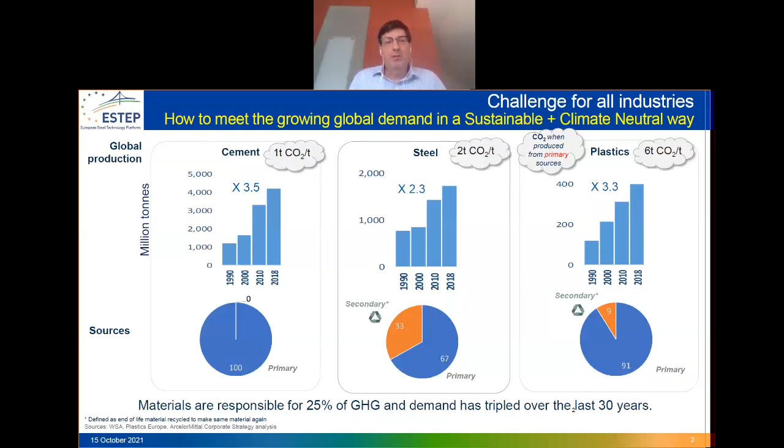We are convinced that the technologies fulfilling this objective are finally the winning ones, meeting the criteria of scalability, affordability, and contributing to a high level of circularity.

For steel, this means we have 2 basic approaches: starting with iron ore, the so-called primary steelmaking, and the second steelmaking route starting with scrap. Both will play a major role in finding solutions, and both are still challenged to significantly improve.

If you look at the real figures on the right side, the left one is primary production, starting with BF-BOF, blast furnace, basic oxygen furnace. Typically today it's around 1,800 kilograms of CO2 emissions per ton of crude steel. Following the Green Deal objective Andrea pointed out, we have to go down by 55%, meaning 810 kilograms emissions. Climate neutrality means going down 85–95%, and 85% means 270 kilograms of CO2 emissions. So these are really huge challenges lying ahead of us.

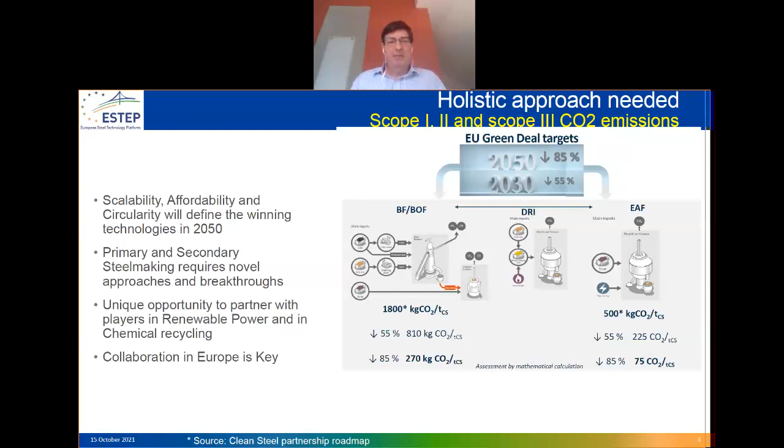The leading instrument for collaboration is the Clean Steel Partnership, aiming at accelerating the ongoing and planned work of producers towards climate neutral steelmaking. The two next speakers will give impressive examples of company approaches to really make it happen that CO2 emissions are reduced, because the partnership, as Andrea already pointed out, brings together the public and private side.

From the private side, it's ESTEP, the European Steel Technology Platform, importantly supported by Eurofer. So Eurofer, the steel producers and associations, broadened by ESTEP to include plant builders, research organizations, academia, and other stakeholders along the steel value chain.

I cannot dig into all the details of the partnership, but let me emphasize that it is all about having impactful projects, so large demonstrators, at least 4, reducing CO2 emissions by 50% or even 80%. That's the objective of the partnership, to deliver such demonstrators.

It also brings a unique element in blending financial public means. One is 350 million euro from Horizon Europe, and the other financial pillar comes from the European Community for Steel and Coal, so to speak, the grandfathers of the European Union as such. This last bullet point indicates a very important contribution, but it's not the full financing of the need for research and innovation.

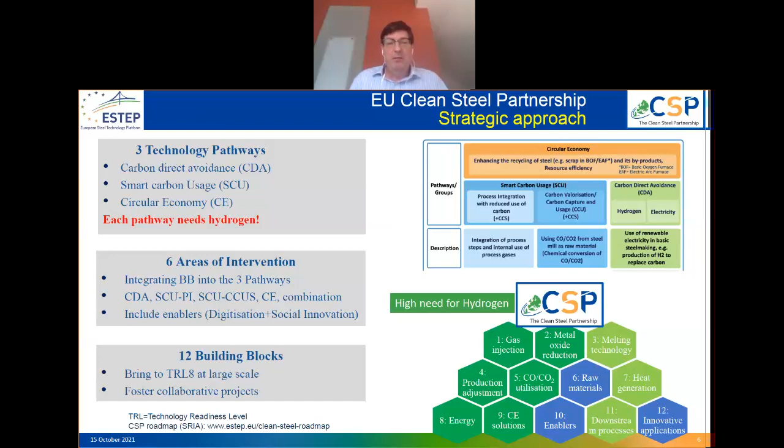Next one, please. And as I said, it's about accelerating towards climate neutrality and really having impactful projects so that the CO2 is saved, because the partnership is about research and technology development. The follow-up, the implementation at industrial scale, delivers the reduced CO2 emissions. This is illustrated on this slide.

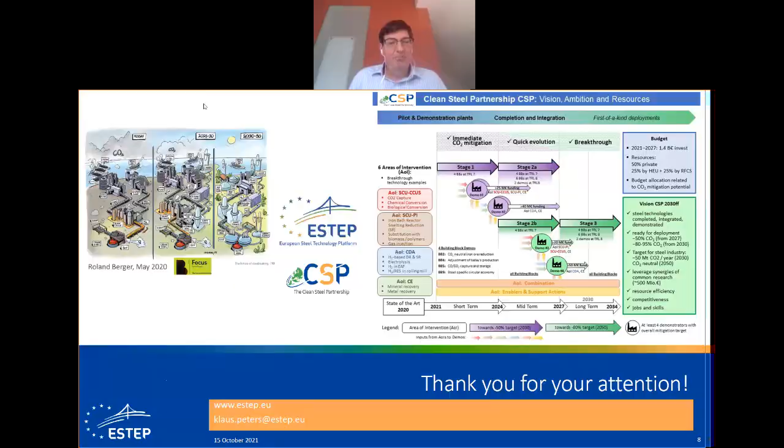Again, an immediate question would be from me, and I know it's a bit challenging to put it so bluntly, but if we would decarbonize and produce green, the so-called green steel, is there a lot of cost involved? What would be the extra cost of producing green steel? Just a ballpark figure in your opinion.

So please allow me to answer from two perspectives. The one element is that the reason why green steel is more expensive is linked to the additional energy needed when changing to other processes. If you go to hydrogen-based steel making, something like 80% more cost is estimated, and it all depends on the cost of hydrogen. So let's wish all success for the Clean Hydrogen Joint Undertaking to develop affordable solutions. Also in CCU, the transformation of CO2 needs tremendous amounts of hydrogen, so the electricity price and the hydrogen price translate into this.

Now, also sharing a figure with you: if we translate the extra cost into the cost increase for the final product, the numbers are more tangible for non-experts. We have the estimation, for instance, if we go to the automotive sector, a very important one, and implement our technologies, the cost increase for a medium car is in the area of 200 euros, which is not so much compared to the overall price of a car.

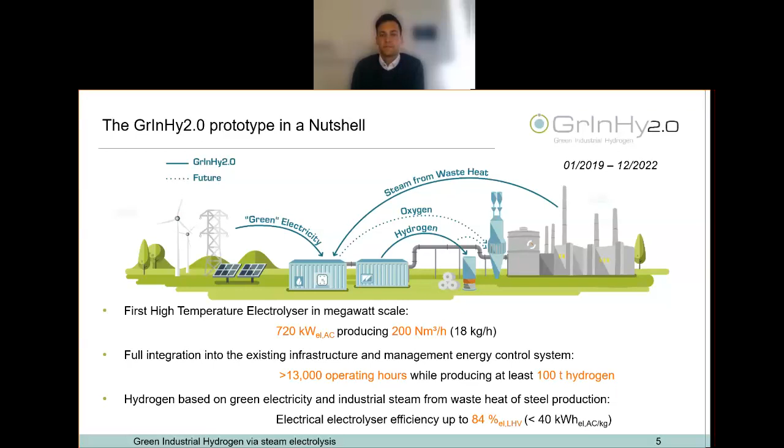Next slide, please. The prototype system, as you can see in the picture, consists of two containerized units. In front, you can see the electrolyzer unit, in a 40 foot container. The unit consists of up to 8 modules with a maximum of 1080 SOECs each. SOEC stands for solid oxide electrolyzer cells, which is basically the core of the steam electrolyzer we have here in Salzgitter.

Today the steelworks already has a hydrogen demand of 400 to 450 cubic meters per hour. The hydrogen is used on site to establish a reductive atmosphere for the annealing of our cold rolled steel products, or during the hot dip galvanizing processes.

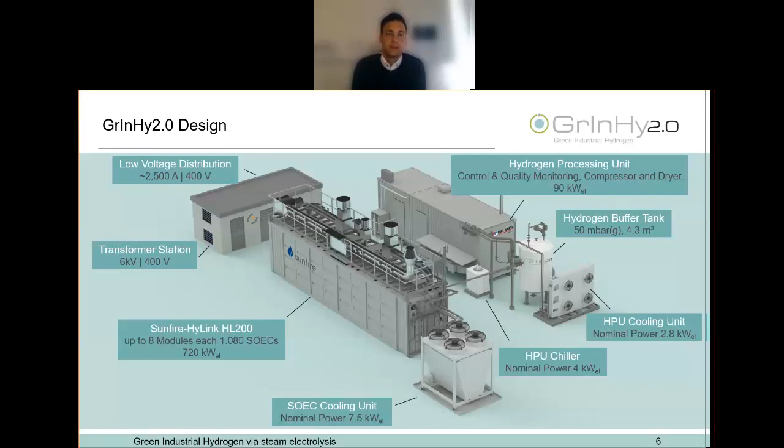So where are we now? Since March 2021, we've injected more than 24 tons of hydrogen into our pipeline.

The actual capacity of the electrolyzer system right now is at 50%, while we want to reach 200 cubic meters, so 100%, by the end of this year. Since May, for about 80% of the time available, we were producing and injecting hydrogen, while we were already reaching the electrolyzer efficiency target of 84% that we've targeted.

The system boundary for this parameter includes the whole electrolyzer unit with its balance of plant, so just as we've seen, the container unit together with its dedicated cooling unit. So in the end, when it comes to electrolyzer efficiency, we're talking about saturated hydrogen at atmospheric pressure.

Besides Sunfire as electrolyzer provider and Salzgitter as the operator, the consortium consists of Paul Wurth, responsible for the hydrogen processing unit, and Tenova, responsible for a future rollout study of hydrogen-based steelmaking in Europe, which should be of interest to most of you. And then there's CEA, responsible for long-term stack testing of a 30 cell SOEC stack.

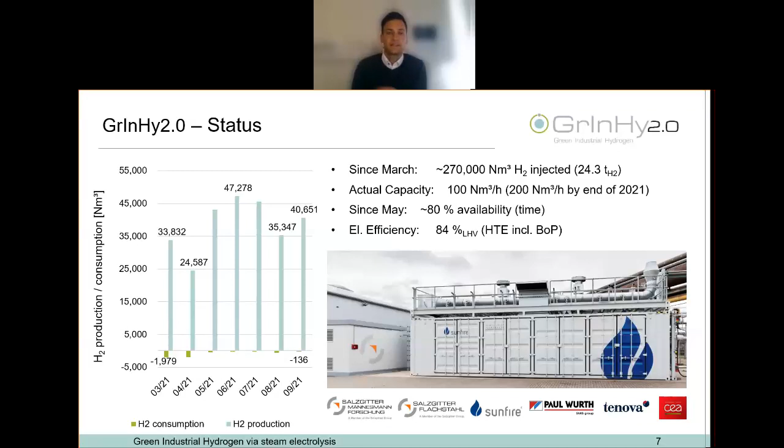As promised, I'd like to quickly talk about our carbon direct avoidance approach. Thanks, Klaus, for introducing this term, and also to our timeline.

Right now we at Salzgitter are producing most energy efficiently our crude steel based on carbon and iron ore. The central process of the production route is the blast furnace. Although the route has been optimized for decades, CO2 emissions are ultimately inevitable.

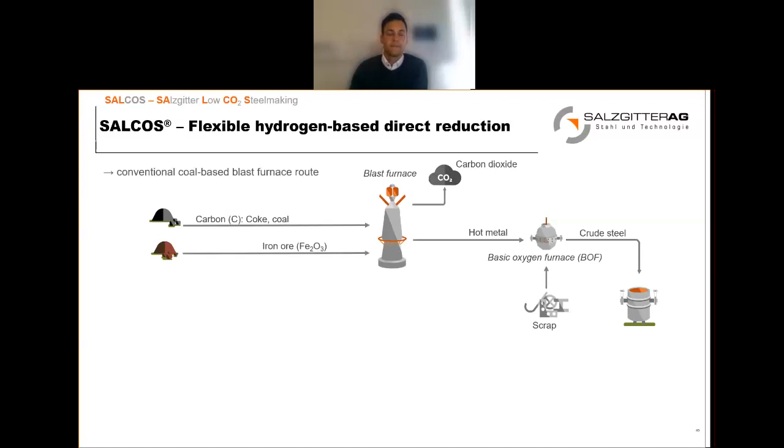That's why we at Salzgitter Group have been developing our SALCOS project, which stands for Salzgitter Low CO2 Steelmaking, since 2015. The SALCOS project is a CO2 avoidance project, and with it we want to replace the existing production route with a direct reduction plant and an electric arc furnace.

Unlike the blast furnace, the direct reduction plant is not based on solid carbon as a reducing agent, but can be flexibly operated with any mix of hydrogen and natural gas. By doing so, we can substantially reduce our CO2 emissions.

The product of the direct reduction plant is solid direct reduced iron, which then has to be melted in the electric arc furnace to, in the end, produce the same amount of crude steel with the same quality as today.

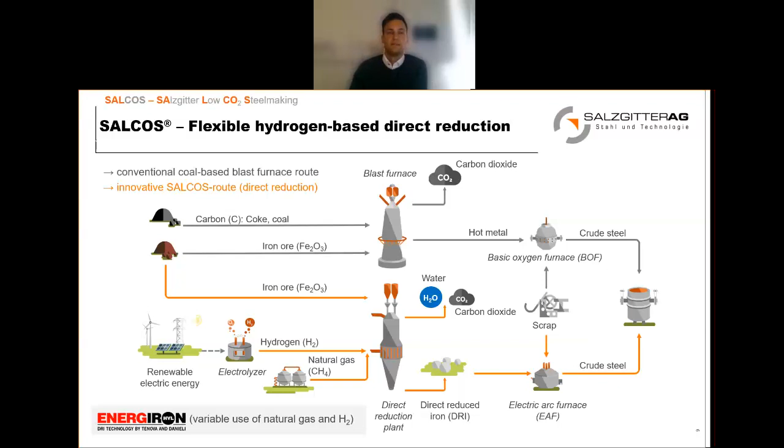As of today, the iron steelworks of Salzgitter Flachstahl is operating 3 blast furnaces to produce 4.5 million tons of crude steel every year, but it also emits about 8 million tons of CO2 annually. That is equivalent to about 1% of Germany's direct CO2 emissions.

With SALCOS and its 3 stages, we want the first SALCOS stage operational by 2026 at the latest. This stage consists of 1 direct reduction plant coupled to 1 electric arc furnace and a 100 megawatt low temperature electrolyzer. This setup will already reduce emissions by 2.3 million tons of CO2 every year.

It's going to be a low temperature electrolyzer, simply due to the reason of technology readiness level. However, in the future we see the high temperature electrolyzer as a promising technology to increase our hydrogen production capacities and also to increase the overall energy efficiency.

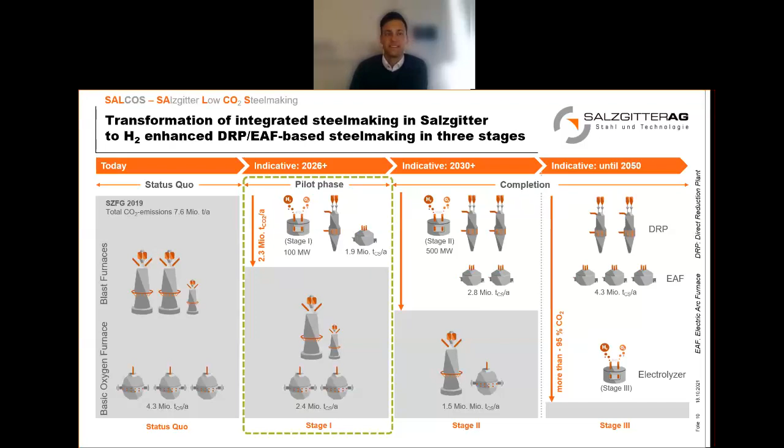Thank you very much, Simon. I'm not going to put the question anymore about the technology. I don't think it's a matter of choosing the technology, honestly. You made it very clear, both have advantages and disadvantages, and it depends on what you want to do in choosing the low temperature or high temperature. But let me put another question: is there any safety precaution or safety measure that you have to put in place when installing such big equipment like electrolyzers in a steel factory?

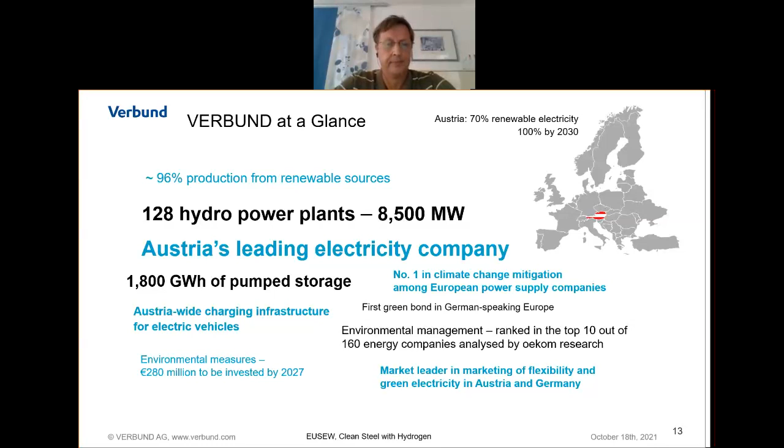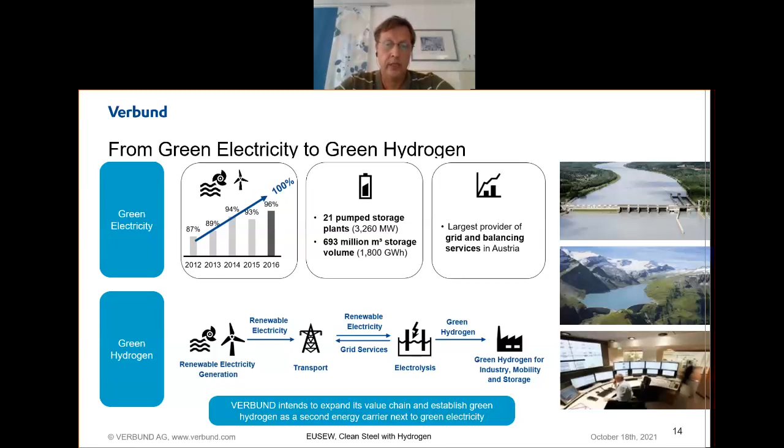Next slide, please. In this project, we had two general tasks in total. One is the design and installation of a 6 megawatt PEM electrolyzer, which we did at the site of voestalpine in Linz, Austria. The second big task was a 2-year demonstration operation of this electrolyzer system. The focus was on the process itself, on the quality of hydrogen that is coming out, and we did this together with our project partners, voestalpine, and the technology comes from Siemens - the newest generation of electrolyzer system, low temperature.

We were supported also by K1 Met, involved in metallurgical research. Our daughter company APG is the transmission system operator of electricity in Austria, and the Dutch company TNO helps us with the global view of the whole issue.

The total project budget was 18 million euros, and it was very well funded by Fuel Cell Hydrogen Joint Undertaking with 12 million. We extended the project already to 5 years, which ends now, end of December, but we will really continue with the journey.

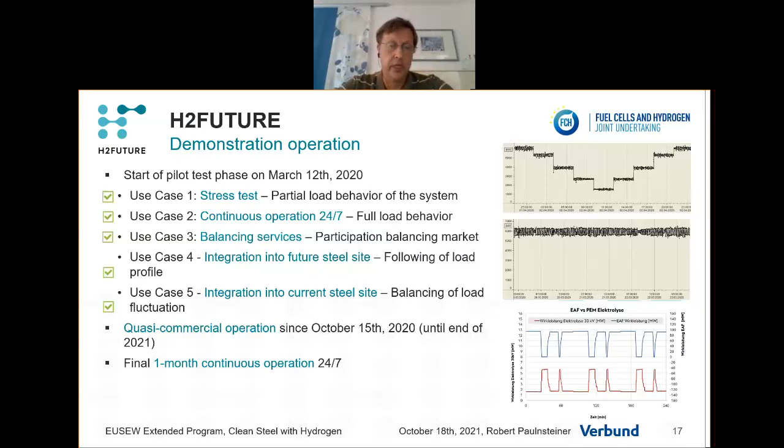Since October 15th, we are in quasi-commercial operation, and this will last until end of this year. Finally, maybe in January, we have a 1 month continuous operation for testing every use case one more time. So this is how we run the plant currently.

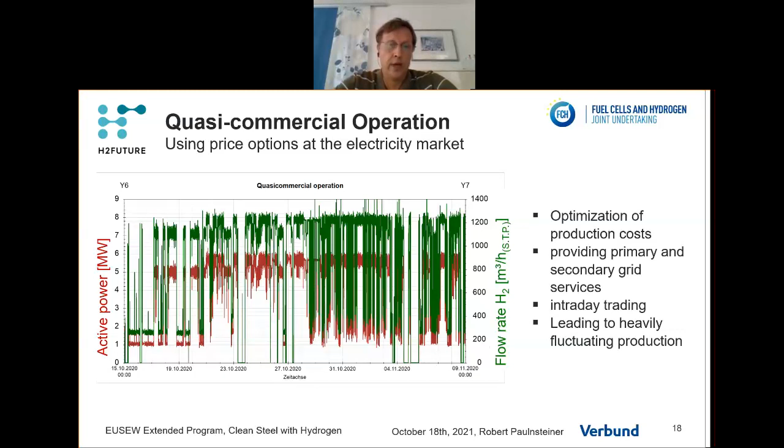You can see that the load changes very frequently. We are using price options on the electricity market, going to a low load of about 1.5 megawatt, and maximum load 6 megawatt. In between, we try to find good options to decrease electricity costs, which is currently a very important issue. If you look at the price market, at least in Austria and Germany, it's really embarrassing at the moment - they are much above 100 euros per megawatt hour.

So this is the history of our plant. Up to now, let's say end of September, we produced more than 667 tons of hydrogen. And this hydrogen is green - it got the green certificate from TÜV, and it has a certain quality.

It's not RED 2, as these criteria are more strong, but it's green. The pressure is low - it's a low pressure system. We don't need this high pressure at the site in Linz, so it doesn't make sense to increase it. And the purity is more than 99.8, and sometimes we reach 99.9% hydrogen purity. The impurities are only oxygen and humidity.

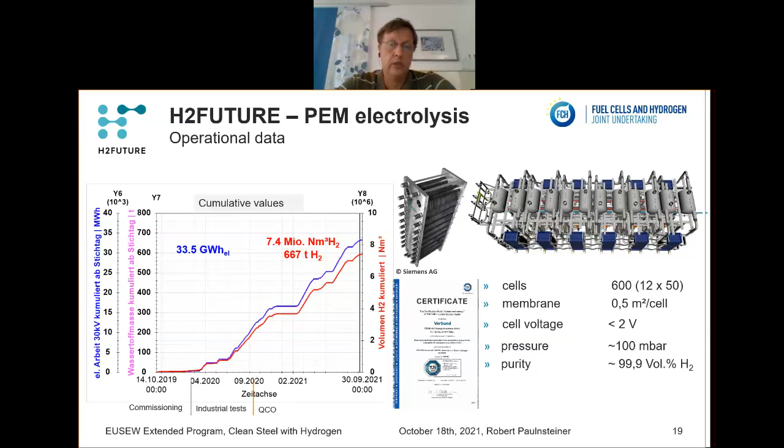So to summarize, the plant has a stable operation between 1.5 and 6 megawatt. One time we even tested the upper load of 9 megawatt - the plant can do it, it can be overloaded, let's say, but the environment is not designed to get such high performance.

As I said, we have no additional chemicals, so we're reaching high purities of hydrogen and also oxygen, which can be an interesting thing also for a steel site to use this oxygen in the future. The plant efficiency is 75% in total, and the stack efficiency reaches values up to 83% with the best modules. It's pre-qualified, so we're still participating in the balancing markets, and large steps in load changes are possible.

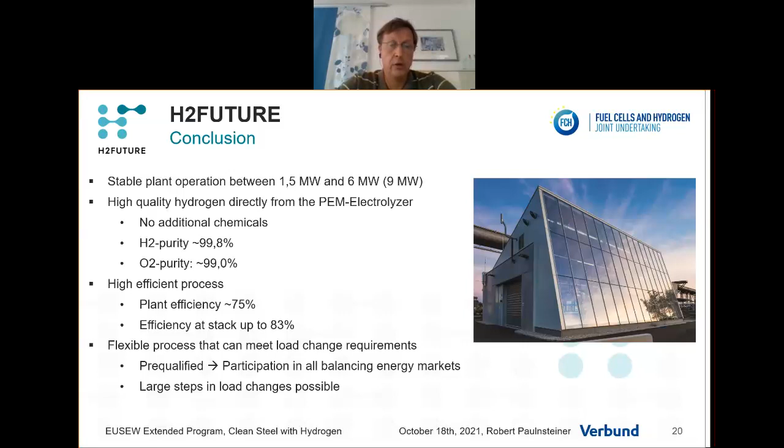We have, of course, a project site where you can find all the information about the project.

This is what we intend to do further, because in Austria, we will not be able to produce all the green hydrogen that we need ourselves. It will come from other countries where production is possible. To give you a number, for future electricity, to get 100% electricity from renewable sources, we need in Austria additional 27 terawatt hours. We would also need more than 27 terawatt hours for the site of Linz to fully decarbonize it. This is such a huge step, it will not be possible, also in the future.

So we need some kind of transport system, and one that we're involved in is the IPCEI Green Hydrogen at Blue Danube concept, where we are also project coordinators. The idea is to produce green hydrogen in countries where there is not yet a developed infrastructure of hydrogen production, and in this example, to transport it via the river Danube to consumers, and finally to do that by the year 2030 to an amount of 80,000 tons of hydrogen per year.

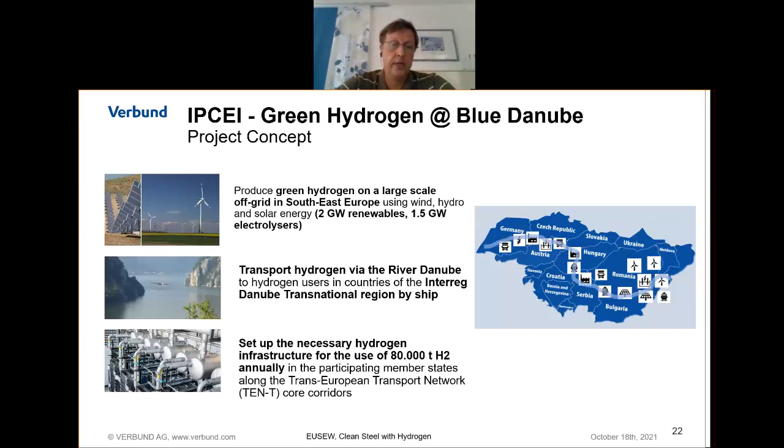Happy to answer your questions.

Thank you very much, Robert. I hope I can call you Robert. Thank you very much for that, and extremely ambitious projects under the IPCEI, the important projects of common European interest.

An immediate question to you also, and I saw that there are some questions coming also in the chat. You mentioned something about the prices, and because your project, you present it from another kind of angle, not necessarily from the process of steel production, but more from the other beauty of the electrolyzers, that they offer grid services. And from your perspective, how is that also advantageous? And now, do you think the electrolyzer should be exempt from electricity grid levies or taxes? And how would any benefit compare to this provision of grid services?

In Austria, until end of 2020, we had a phase that electrolyzers were exempted already from grid fees, and now we have a new law in Austria that they are exempted again, and we saw this. There is a big effect, to give a number, it's between 6 to 10 euros per megawatt hour, which is quite an amount of money, and this has an effect on the production of hydrogen in electrolyzers. If we make it depending on electricity prices, it has a really big effect. And as I think, as the electrolyzer can also do grid services, they should also be exempted, because in the future electricity market, they will be the ones that stabilize the grids, and therefore they should be exempted, yes.